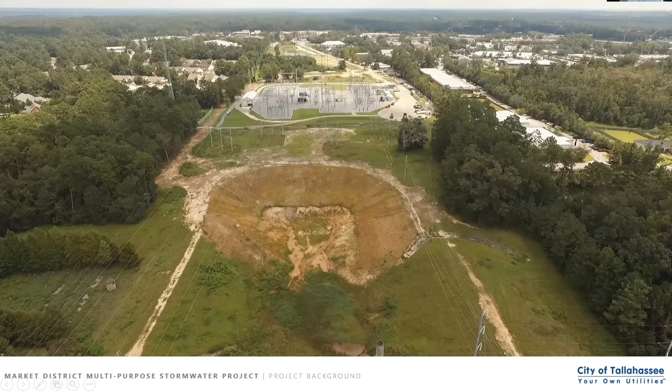Future infrastructure improvements include retrofitting the east and west stormwater facilities and improving area roads. The west pond will be a passive park setting around a picturesque stormwater pond. This photograph is not of the west pond, but it's just an example of what it may look like. The west pond will provide water quality treatment and rate control for the project and the larger Market District.

Roads around the pond for electric and drainage operation vehicles will serve a dual purpose as pedestrian paths, like the one in this photograph. The East Stormwater Facility currently has a very industrial look with steep side slopes and fences. It's actually where we coined the phrase 'ponds in a prison.'

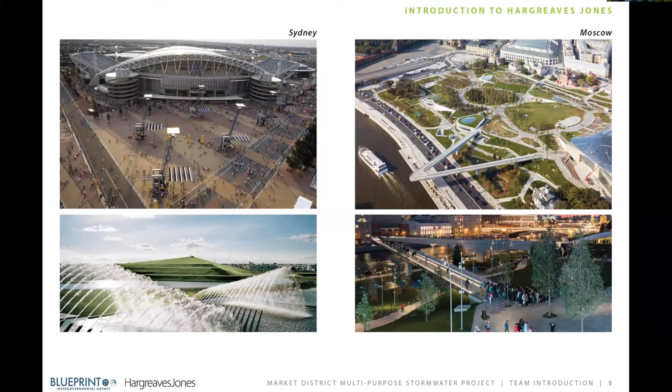Before we launch into this presentation, I want to give you a brief sense of who we are and where we've been. We design parks and public spaces across the globe, from the 2000 Olympics in Sydney to the first large park in Moscow in the last 50 years. Many of these park sites have been intensively developed and their land uses eventually became obsolete. In some respects it's similar to the Market District, where it's been worked over many times and is looking for a new use as a park.

We've designed all the public realm for the 2012 London Olympics, as well as a mile and a quarter of the Louisville waterfront, both now large public parks. Both of these parks are reconnecting people to their respective rivers after years of neglect and change. Our work focuses on integrating the specific site history and proposed uses with functional pedestrian and cycling connections, while also incorporating natural and man-made water features as part of a destination public park. In essence, we're aiming toward a design landscape.

As Dan and Jason indicated, we are working with Blueprint and the city to determine the programming and activities for a Market District Park rooted in community input. Our agenda today includes six different sections describing our process of looking at the physical site in terms of what is there today and how it came to be there. We'll look to local parks that you're familiar with and to our own portfolio to convey how we process physical and cultural and community input into a design landscape.

So our first section today is the site context.

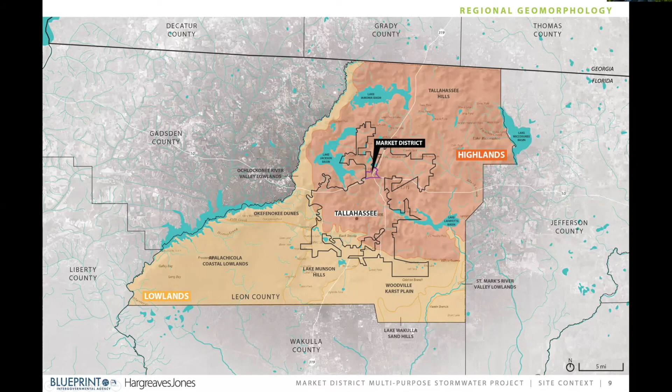Market District sits in the Tallahassee Hills, the Red Hills, a landscape of rolling hills, lakes, and sinks distinct from the coastal lowlands. This purple area indicates where the Market District is relative to Tallahassee, and you'll see recurring this purple indicator of where the project site is relative to the context. The project site sits within a constellation of city, county, and state parks with a wide variety of amenities. It's less than a mile south of Lake Hall and Maclay State Park, about a half mile north of Timberlane Ravine Park, which is downstream from the site, and about 2 miles east of Lake Jackson, an outstanding Florida water, the final destination of the project stormwater.

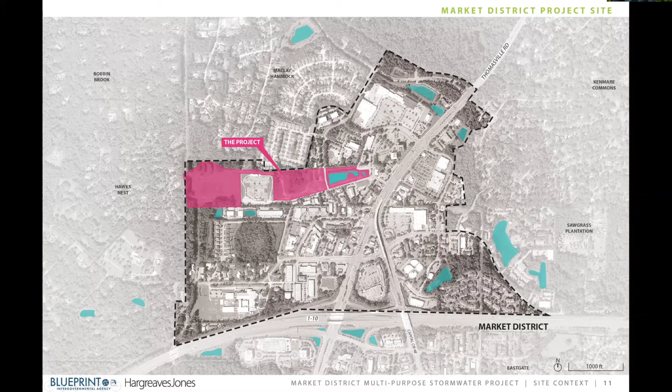The 2011 action plan is really the genesis for the Market District Park idea, as that is the document and the public process that identified these remnant pieces of public property that could and should be put to a better use as a public park. That 2011 plan covers a broad range of district-wide topics with a targeted advocacy for a park here on the east side of the Market District. The plan also anticipates future improvements of pedestrian and bike circulation upgrades.

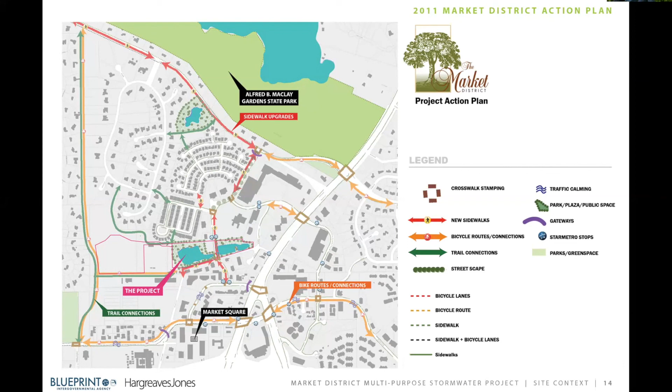The Red Hills soils made this a highly desirable region to settle and farm. Tallahassee as a name is tightly tied to this land and synonymous with old fields.

Tallahassee has been inhabited by successive waves of different cultures, native cultures stretching back more than 8,000 years. So it's not surprising that there are numerous historical and cultural resources spread throughout North Tallahassee, from pre and proto-historic native cultures to European exploration and settlement.

It was this initial European contact that resulted in a massive depopulation of this region due to sickness and conflict, and ultimately led to big changes in the landscape itself.

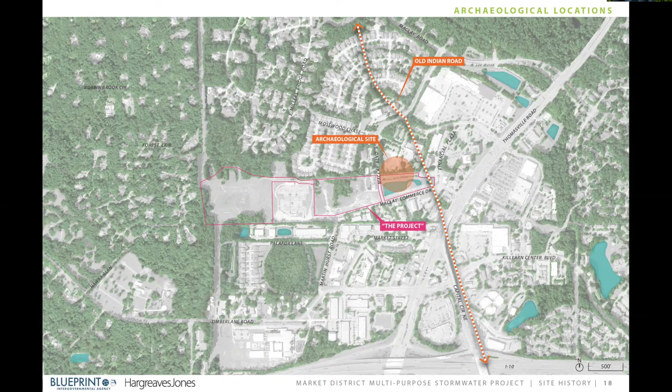It's a challenge to summarize a deep regional history briefly from a landscape history perspective. The shift from the use of enslaved persons to support the southern economy toward a succession forest gave rise to a broader economic reset, with a landscape focused on quail hunting and a forest ecology worthy of conservation.

The transition from fields to forest can be seen through maps and aerial photographs. Andalusia was one of the early plantations in what is now the Market District, circa 1850s. By 1883, Andalusia's owner was promoting the surrounding lands as advantageous for vineyards and views.

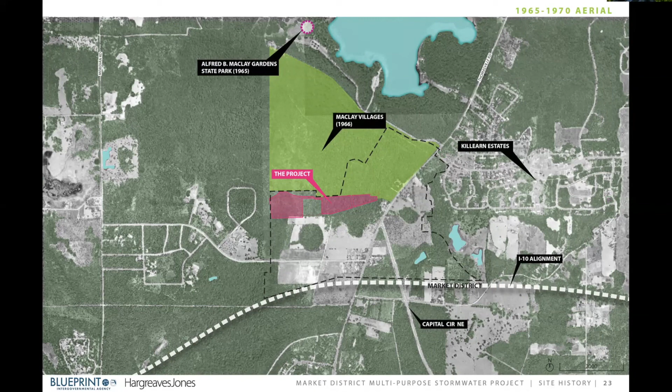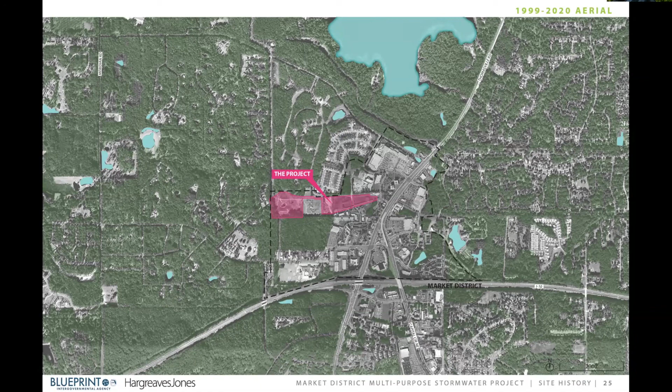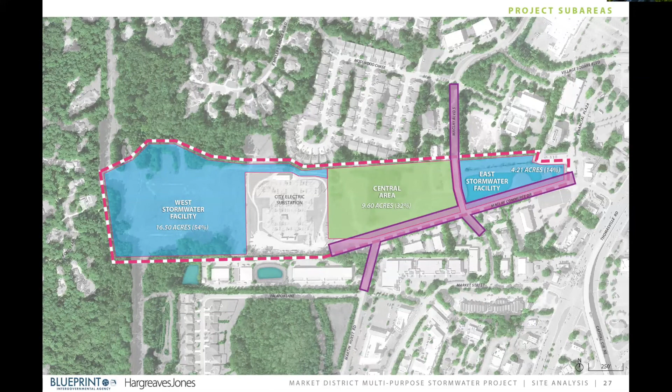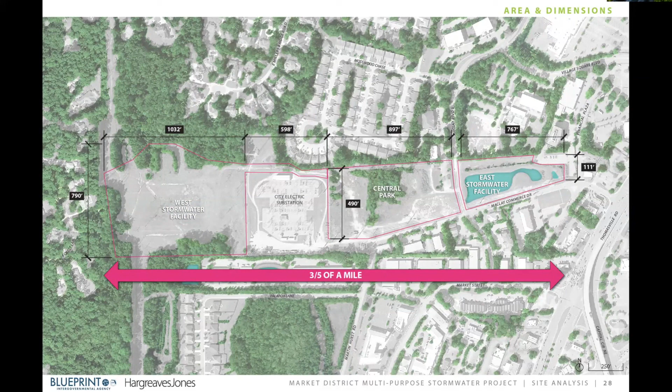Overall, the project site is 3/5 of a mile in length. It starts out about 110 feet wide on the east side, gets to about 500 feet in the middle, and then closer to 800 feet wide on the west end side. So it's a bit of a wedge shape.

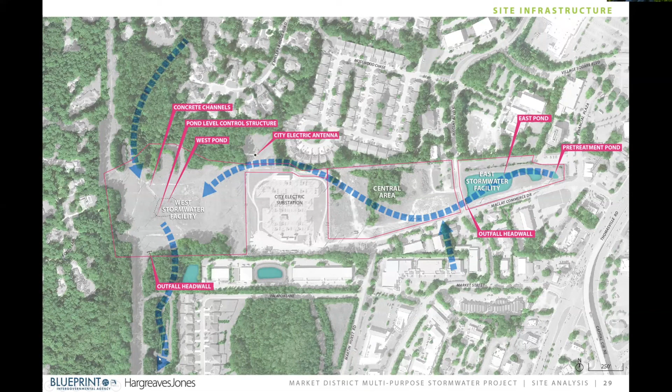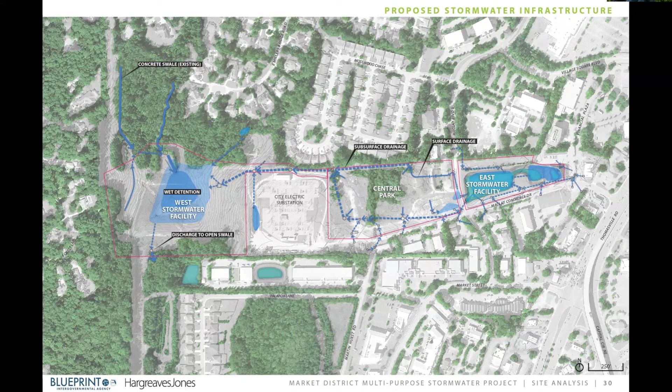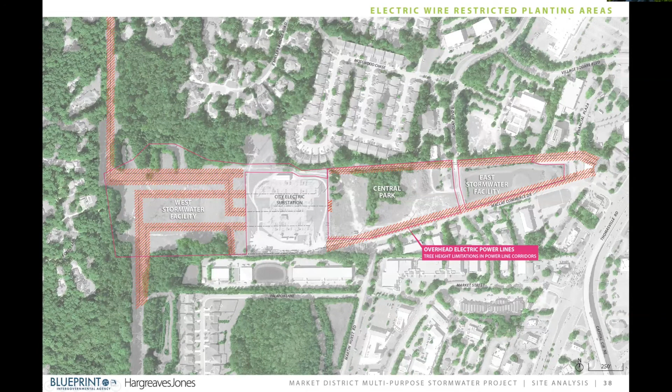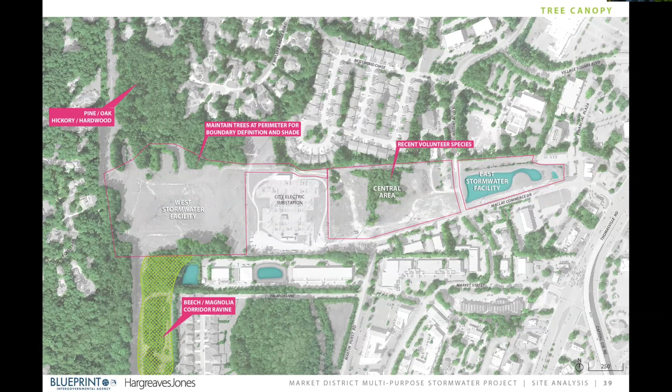So we're going to move on to local park precedents. We looked at 8 different area parks as representative and comparable to varying degrees to the Market District site, Maclay State Park to the north, down to Lake Elberta and Lake Anita to the south. This covers a range of city, county, and state parks that we believe are comparable to Market District in different respects.

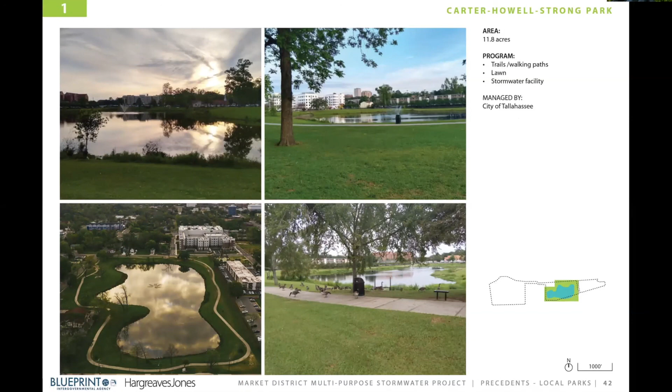Some of these parks integrate amphitheaters and splash pads, as well as trail circuits with the stormwater infrastructure. Others have a smaller, more naturalized stormwater pond set within larger swaths of mown lawn for events and informal play. Several of these local parks rely on perimeter trails as the primary amenity, with secondary passive seating areas and shade as a key component for personal comfort.

Some of these local precedents are much larger than the Market District Park; however, a lot of that acreage is tied up in the water surface. The proportion of water to land is reversed in several of these parks, so there's more mown lawn and a smaller selection of activities—picnicking and playground—set within an enveloping naturalized landscape.

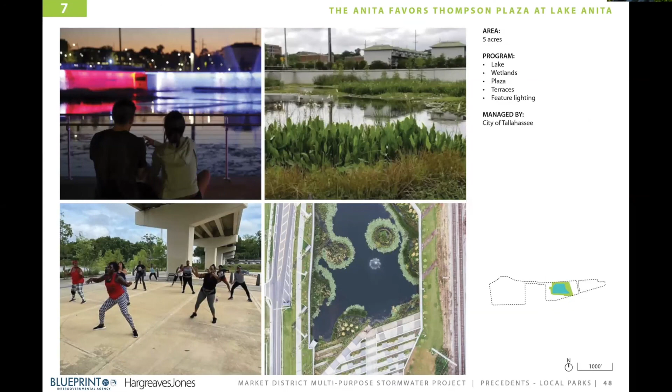More recent examples, such as Lake Anita, provide a stormwater function with vegetation used to accentuate a designed habitat with ample pedestrian access and use. And then the state parks tend to be a bit more expansive with significant forest canopy, broader recreational activity options, really not possible at the Market District project area.

So we wanted to show 7 parks from our portfolio really briefly that speak to similar scales to the Market District and context to give you an idea of how we balance historical and cultural resources with current demands for public access and recreation. Our intent here is to show you something beyond Tallahassee that might spark an idea with you.

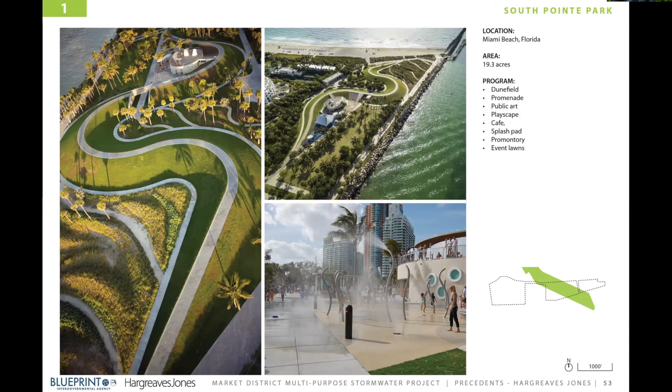We'll start with South Florida. This is a park, South Pointe, that transformed the government cut edge into a pedestrian promenade with a simple serpentine landform that offers elevated views in all directions. The program is tucked within the curves of the landform itself. Some areas are mown, some are dune restoration areas.

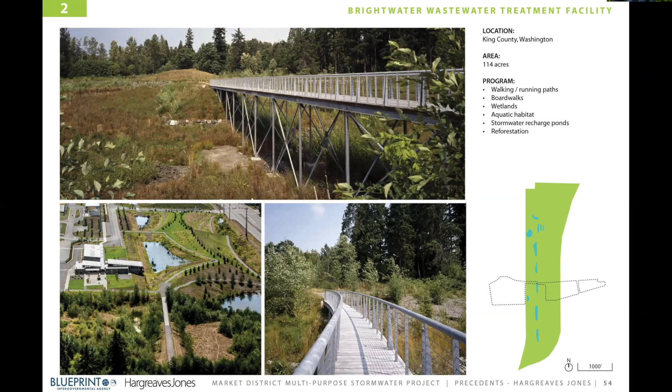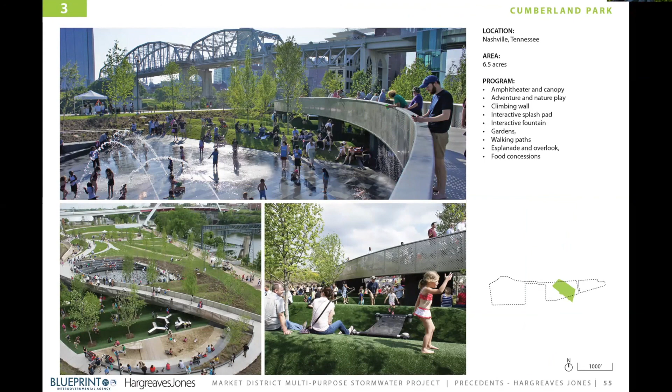In Nashville, Cumberland Park is comparable to the Market District in size. This project has a lot of activities in a very small footprint, and it includes environmental play, climbing opportunities, splash pad, amphitheater, and access to some existing industrial infrastructure artifacts that were left on site, and we incorporated those into the park itself.

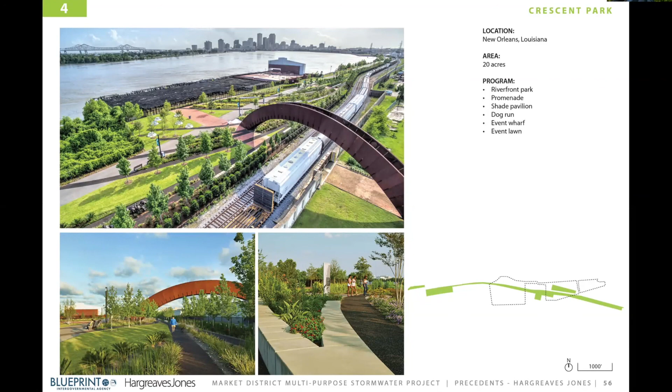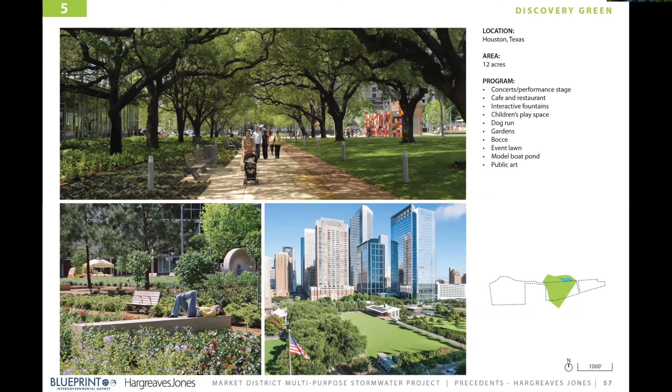In Houston, we converted surface parking lots in what was the sleepy end of downtown to become an extensively programmed park. So it has underground parking, it has large event venues. It's been used for Super Bowl and Final Four celebrations, but it's also flexible, and the key is comfortable enough for daily Zumba classes, balanced with ample shade and gardens for a really informal and passive place to go to.

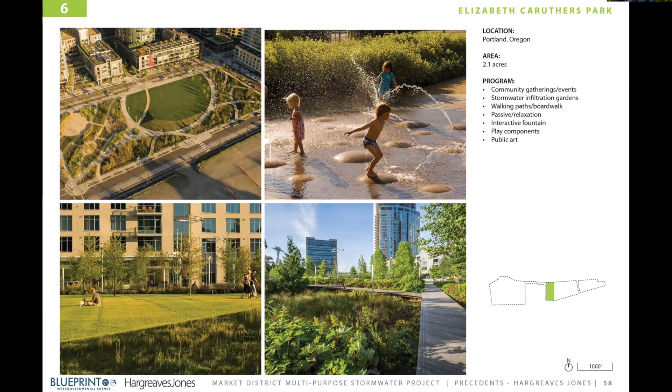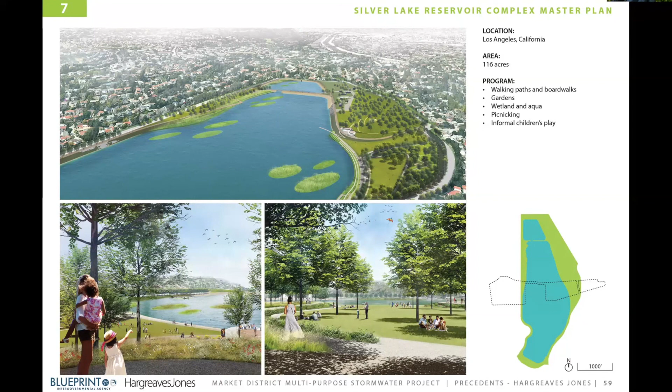So we're trying to think of ways to best approach the topic of activities and to engage you in that effort. We've grouped a broad selection of 7 different categories to help spark your input. So that includes nature and education, social gathering and food, arts, culture and events, health and wellness, and support facilities.

So let's circle back to our primary objective here. We're asking for your input on what this park should be. These are brief descriptions. Helpful here is a checklist all on one page, but it's probably helpful if we show you some examples from elsewhere to suggest possible ideas.

So the next series of slides, we're juxtaposing different activities and different materials and different elements and components for you to think about. So in this case, permeable trails versus more formalized paved walks, wetlands as distinctly different from gardens rich with planting diversity that are accessible to pedestrians.

Thinking about education, should this Market District Park focus more on passive interpretation through signs, or should it anticipate more formalized small groups or scheduled class visits focused on a particular narrative history, cultural history, maybe stormwater or electric infrastructure, something that ties this park's narrative to this particular site in time.

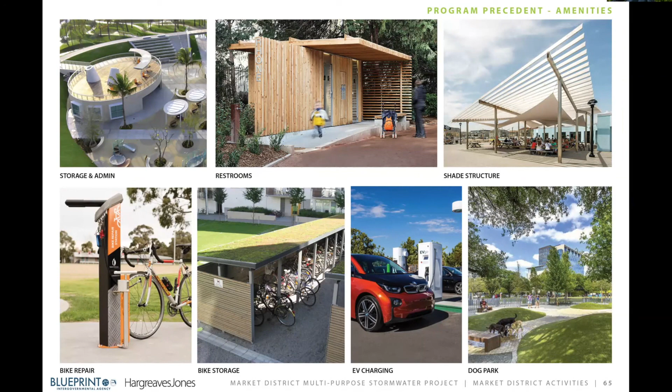The question of support facilities and amenities. We're certainly going to have benches and lighting, but the question here is much larger. What day-to-day support facilities make sense for this Market District Park? Should there be on-site administration or storage space? Should there be restrooms? Shade is going to be a key component. Should we supplement that with recharging stations? Maybe a fenced-in dog park.

In terms of food and gathering, we'll certainly have tables for families and groups, but what other larger event or food-focused capability is appropriate here? Should it include a brick and mortar cafe versus a more temporary movable kiosk? Food trucks, farmers market—how permanent and how temporary should these food-focused amenities be for this site?

In terms of arts and culture, we need to hear from you regarding performance venues, if any, for this site, and how best to incorporate art into the site. Should art be temporary and changing each season? Should it be permanent? And if permanent, what sort of scale and how much of it in this landscape?

Relative to play and recreation, should the focus be on more natural, environmental climbing-type play, or should it be a more conventional playground? To what extent should water play be included? Should there be small court games like bocce? Or should we focus more on a flexible lawn space to throw a frisbee or run around with friends, versus a more dedicated space for a skate park? Those are the broad range of topics, and we'd love to hear more from you on those.

With regard to basic health and fitness, should we lean more toward an open-ended multi-use trail similar to the other area parks, or should we aim to include fixed specialized facilities for exercise, skating, or cycling?